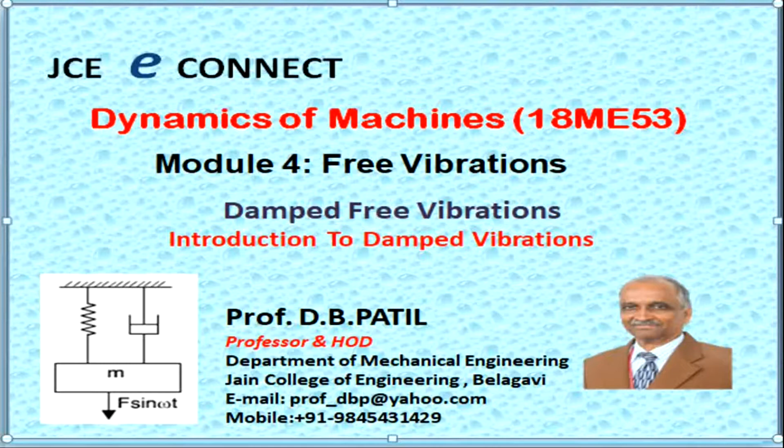Hello everyone. As I was telling in the last couple of hours, I shall start damped free vibrations, but somehow by taking a few more single degree undamped systems, I went on to discuss undamped free vibrations of single degree freedom systems in my last class. I have taught it for several hours, maybe 20-25 hours. But looking at the syllabus content and time permissible, I wound it up.

That topic is so interesting, and if you refer to any book, you will find hundreds of systems. If you have interest, you can go through and solve problems. But I am not 100% sure you can rely on that kind of question in the examination. We now have a topic, damped free vibrations, which is relatively simpler and more mechanical, substitution kind of problems, and therefore from the examination point of view this is highly reliable. But to understand this, you can't be blind about undamped free vibrations - if you don't have any idea about that, you won't be able to follow.

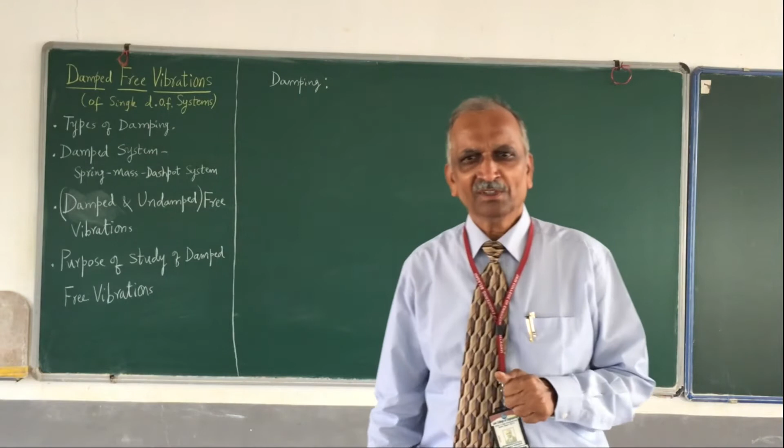Say you are riding a bicycle on a smooth road, and if the wind is opposing you, you have to pedal so much that you put in a lot of energy to proceed further. What is the meaning of that? Air is resisting your motion. That is nothing but air acting as a damping.

Similarly, the kind of mechanical systems, the machines which we model, we call systems - it may be single degree freedom or multi-degree freedom system. Damping is bound to be there in all our real systems. Then when it is not there, why did we study undamped vibrations? The purpose of studying undamped free vibrations was to know what is the natural frequency of the system.

Now also for damped free vibrations, since any frequency of free vibrations is natural frequency, and the system is damped but the vibrations are free vibrations, I am going to find out what is the frequency. What should I call this? This frequency I call damped natural frequency.

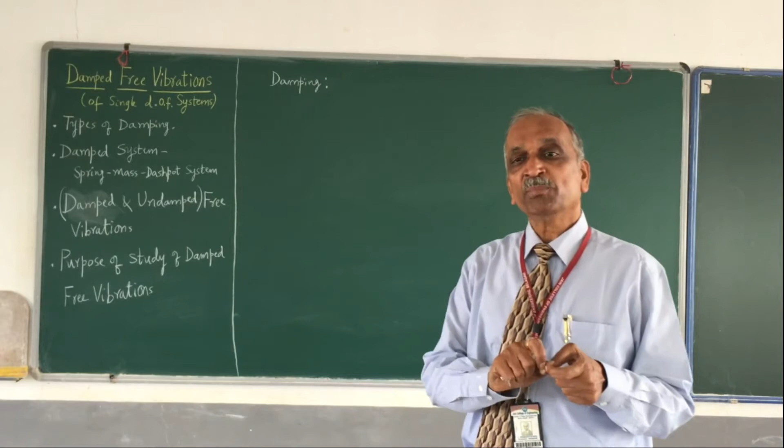In case of undamped natural frequency, I didn't call it undamped natural frequency - by default, whenever I say natural frequency, it means an undamped system. If I have a damped system and want to talk about natural frequency, I shall call it damped natural frequency. Of course they are related, and what is the relationship between the two, all that we shall study.

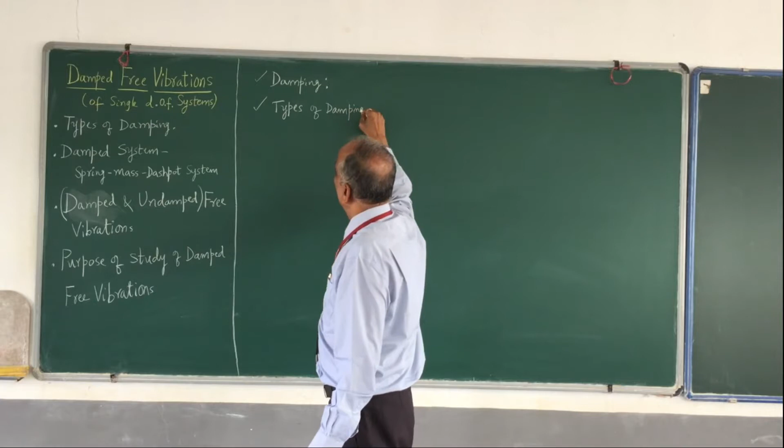So we have understood what is meant by damping - the resistance for motion. Then what are the types of damping in our mechanical systems, the machines? What are the different dampings we come across? This is a very common question that frequently appears in the examination - please write it down: state the various types of damping and explain in brief.

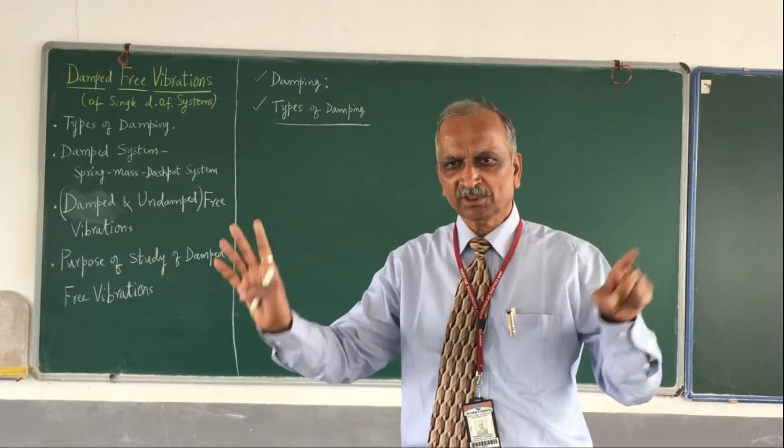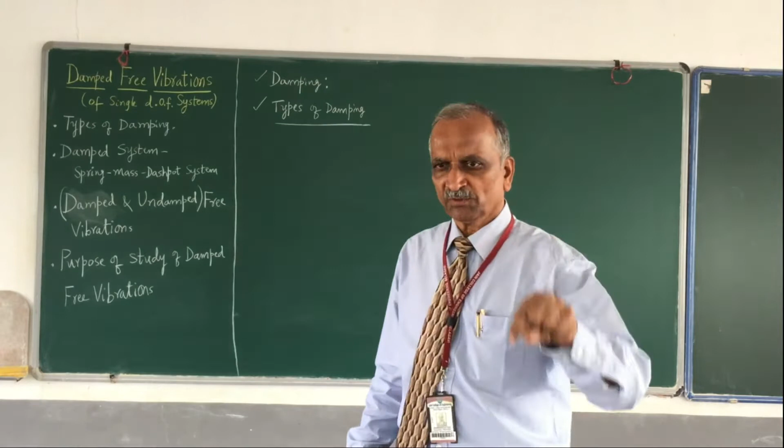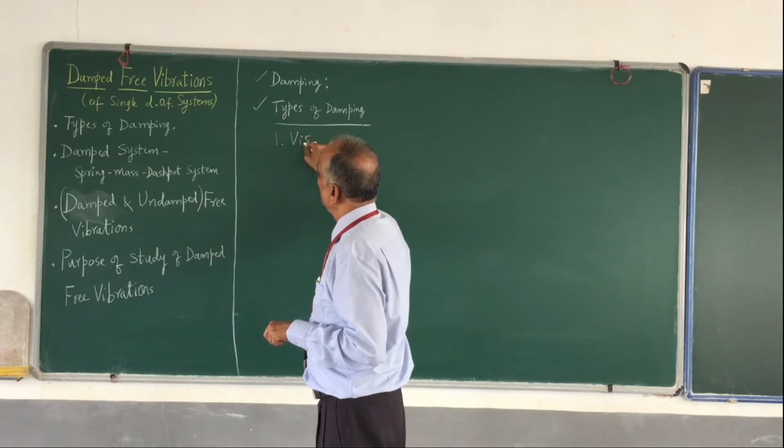That is a very common question for about 6 marks. I shall discuss part of it, not the full thing - I want you to take it as an assignment question and make notes for it. The various types of damping are: number one, viscous damping; number two, Coulomb damping; number three, structural damping.

Structural damping. And number four, non-linear, which is called slip or interfacial damping.

Okay, for part of the question I posed and made you prepare, I have answered: state the various types of damping. These are the various types of damping.

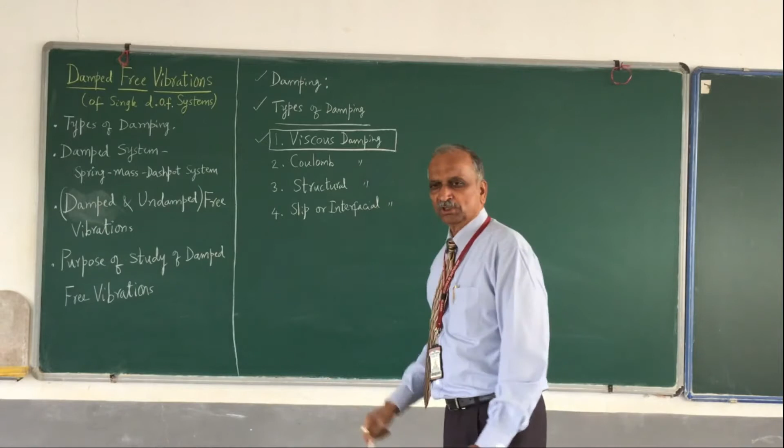I am not going to explain all of them, but I shall definitely explain viscous damping, because this is the one we are going to discuss in our systems in this course. So what is viscous damping? I shall discuss it, and all other things you are supposed to prepare. I shall tell about this.

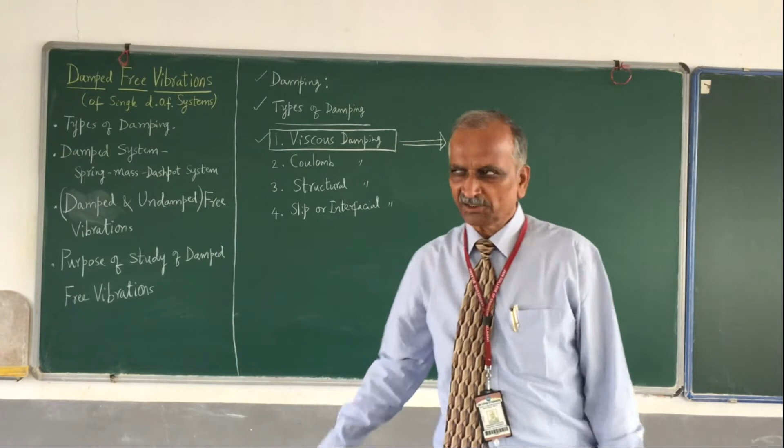What is viscous damping? What is viscous? The term comes from viscosity. Do you remember the definition of viscosity? We never talk of viscosity for a solid. Viscosity is something related to liquid or even fluid for that matter.

Liquids, we have viscous fluid, that's what we keep talking about. The resistance for flow - all fluids flow, we know that. So if there is a resistance to flow, that resistance is called viscosity. Viscosity is the property of the fluid. Every fluid has viscosity, and by virtue of that it resists the flow, it resists the motion of the fluid, and that is called viscosity.

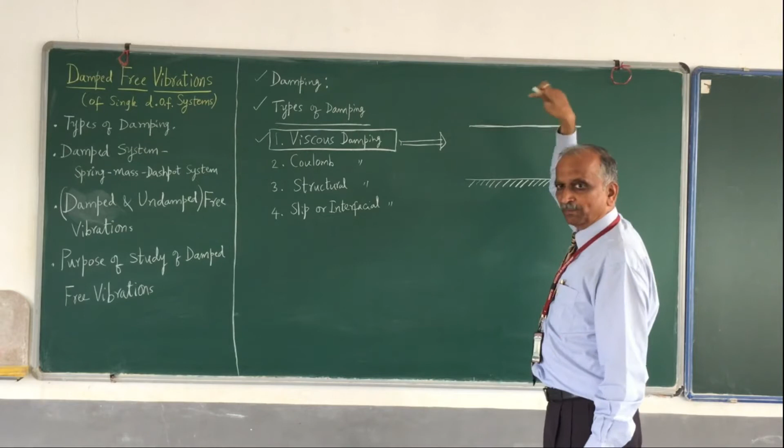So probably this kind of figure - imagine here, with this discussion, say I have a fixed plate. I hope you understand, fixed plate, this plate is fixed. Okay, so I have another plate here. Please remember, it is not a line, it has a dimension perpendicular to it. This is the fixed plate, this is the moving plate. We call it the moving plate.

So the motion will not happen just like that. I have to apply, I must be pushing it. I apply a force F, and because of which it is moving. So this is a plate, and to this plate I apply a force F, because of which this is moving. And in between, what is there? So you have what you call the liquid, you have fluid.

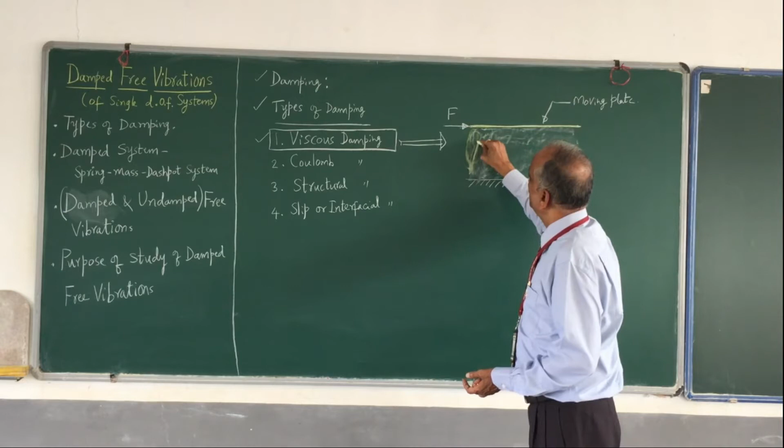Whose viscosity is, say, mu. Mu is the viscosity of this fluid. I shall not go into detail about what is this, what is the definition, what is the unit, etc.

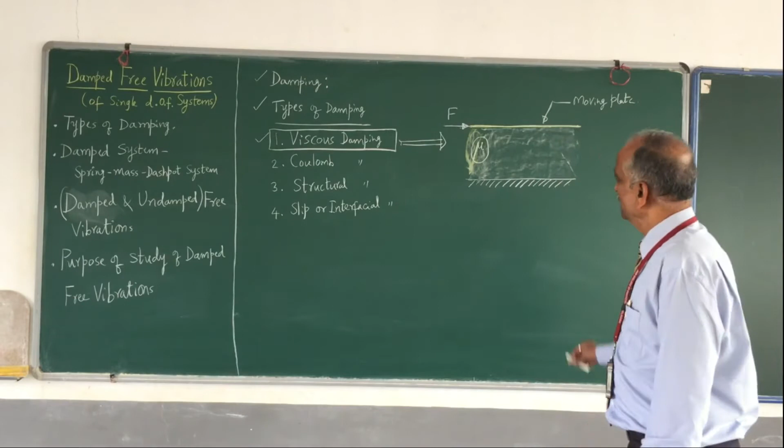Let me assume that this plate is moving very smoothly, or in other words, the velocity is not very high, and even the liquid has to move. The fluid between these two plates, any fluid layer - usually we believe that for smooth flow, the fluid moves layer by layer. So I have one layer of fluid, another layer, another layer. Like that, these will be moving in the form of layers.

Any fluid in contact with the fixed plate has zero velocity. Anything attached to this moving plate shall have the velocity of this plate. That means the velocity is varying from 0 to whatever the plate's velocity. If the plate is moving with velocity v, then the velocity is changing between 0 and v.

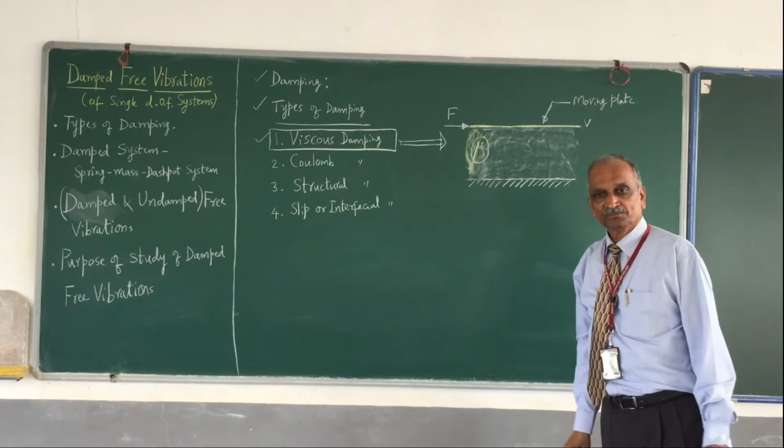How the velocity is changing is very, very important. It may be smooth, say a straight line variation, or it may vary something like this, whatever the variation. Let me assume that this is the velocity, so in this way it is varying. So this is the line. Here the velocity is 0.

So what is the velocity at this distance? That is nothing but this is the velocity. So if I move like this, this is the velocity. At this top plate, this is the velocity, this is what I mean by v. So it may be linear also, depending upon the fluid. This is what we call the velocity variation. So now this is mu, this is the velocity variation.

Why am I telling all this? I am not taking you to a fluid mechanics class, but definitely you have come across this kind of discussion in your fluid mechanics class. So now you have something called Newton's law of viscosity.

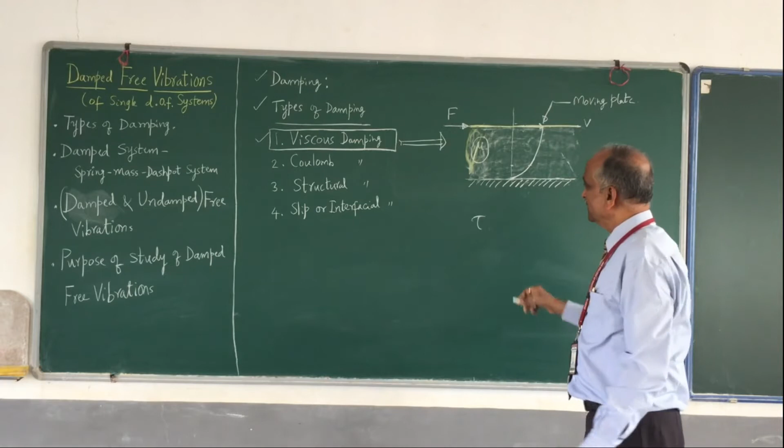Newton's law - what does it say? It says tau, the shear stress anywhere - as I said, one layer is moving relative to another layer, there is what is called shear stress between the layers. That is shear stress, I call it tau. Tau is proportional to... okay, tau is equal to... so what is that? It depends upon the velocity gradient.

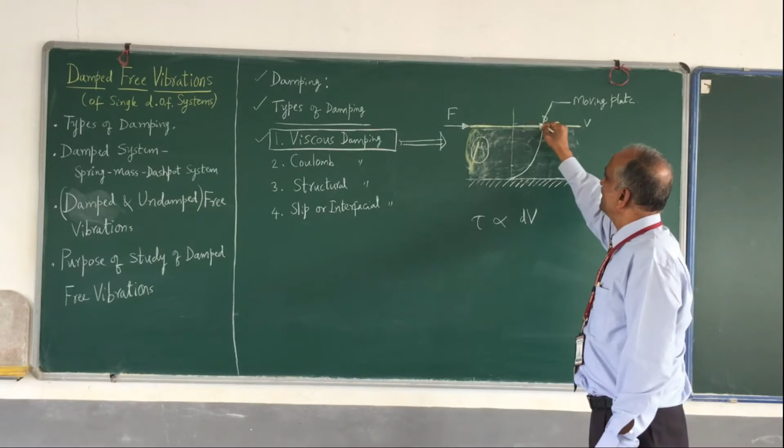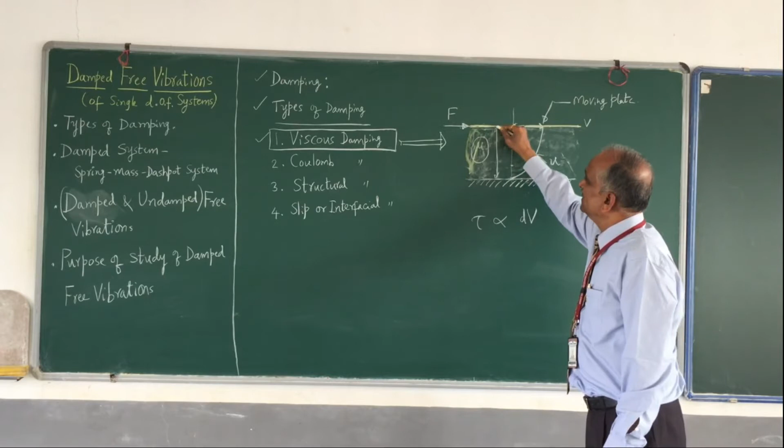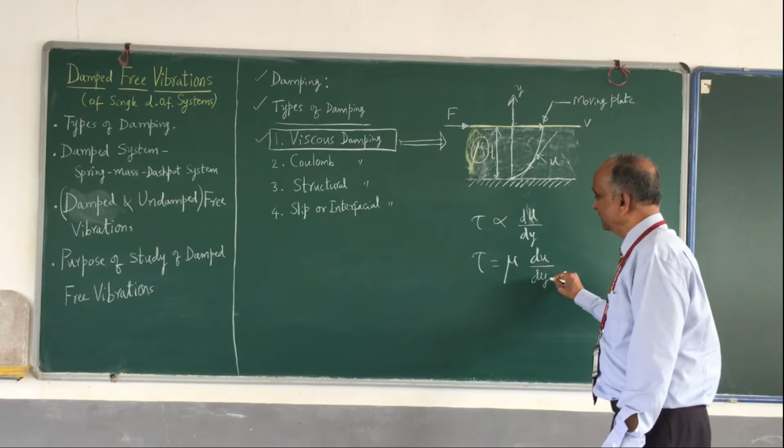So if I want to know what is du by dy at this point, what should I do? I should draw a tangent, then find the slope of that. That is nothing but du by dy. Therefore, tau is equal to mu into du divided by dy. This is the velocity gradient, and tau is nothing but the shear stress.

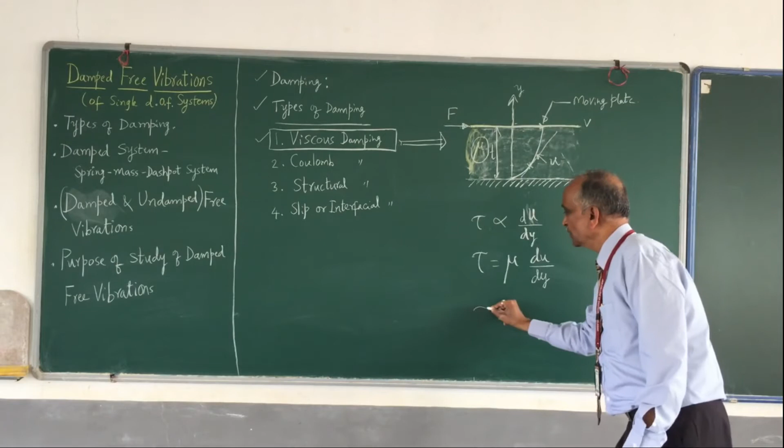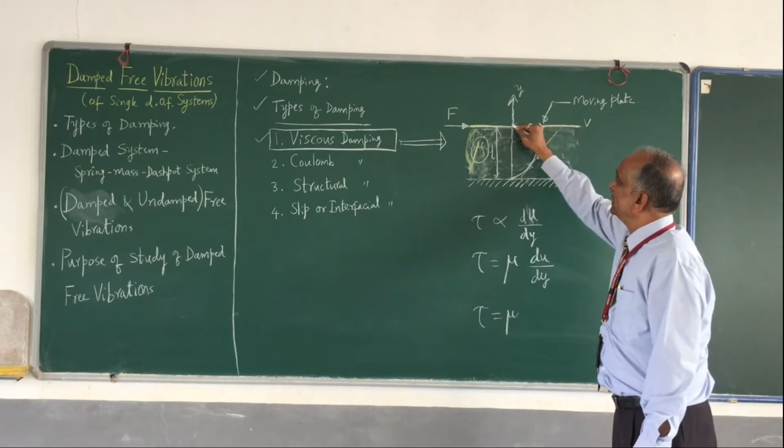So I would like to know what is the shear stress at this level. So in that case, what is tau here? Tau is equal to mu into the velocity gradient. As I know the velocity is v, divided by this distance, which I have called as t, so it is mu into v by t.

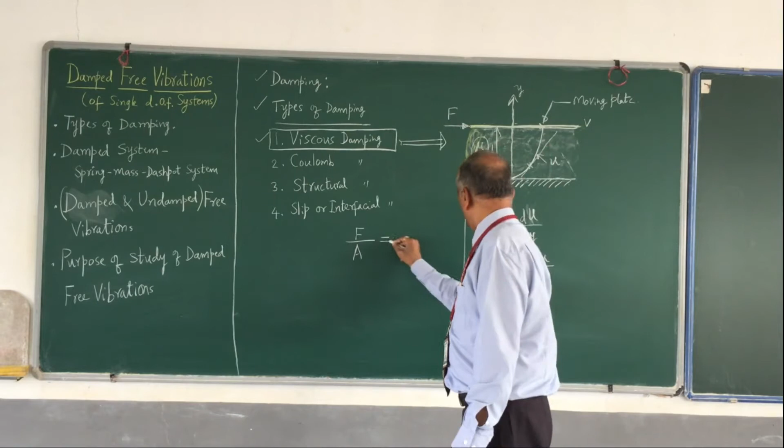As I know, tau is equal to shear stress, which is equal to the force applied divided by the area of this plate, the bottom area of this plate, this length multiplied by whatever is the dimension, that gives the area. So F by A is equal to mu into V divided by T, or in other words, F is equal to mu into A divided by T, this into V.

So I have put some terms within the bracket here. The idea is that for a given case, for a given fluid, mu is constant. Mu is not varying, whether mu is here or here or here, its viscosity remains same. Then the area of the plate remains same, it is not going to change. After some time the area is not going to change either. A is also constant, and this depth T also will remain constant. So how much depth of oil you are going to have, that also is constant.

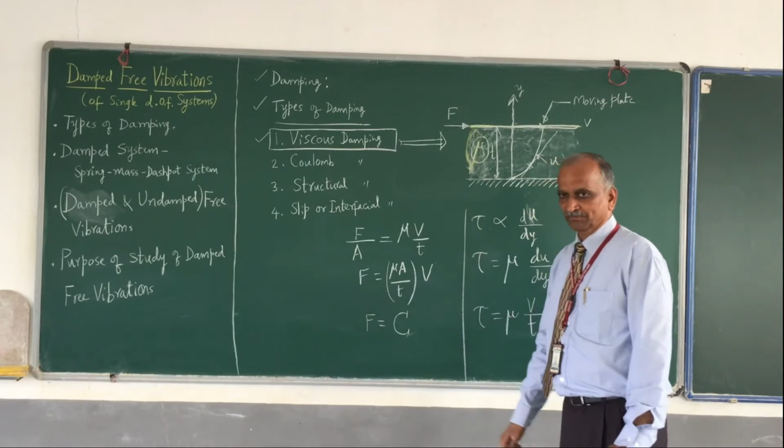That means this term is constant. So therefore I can say that F is equal to this whole thing, which I am going to call C, the coefficient of damping, multiplied by V. So therefore, I call it F is equal to C, and velocity I shall replace it by X dot.

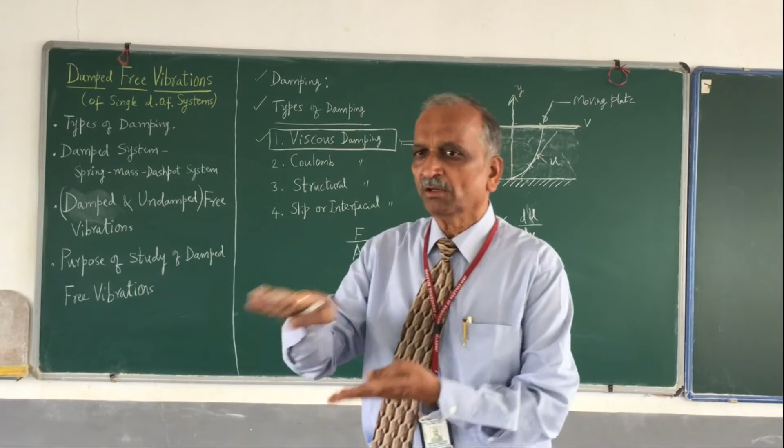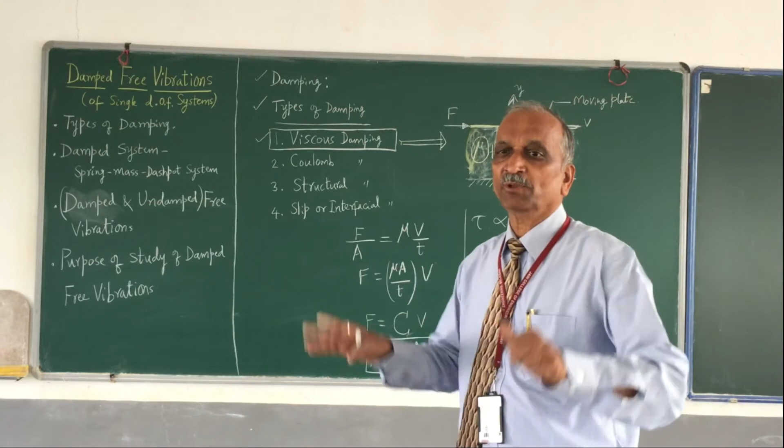So what is this force? This is nothing but the damping force. The damping force is equal to C into X dot, or damping force is directly proportional to the velocity. The viscous damping is also because of the friction between the two layers of the liquid, so this is also called liquid friction. Viscous damping is nothing but the damping because of friction in the liquids, so that friction is called viscous damping.

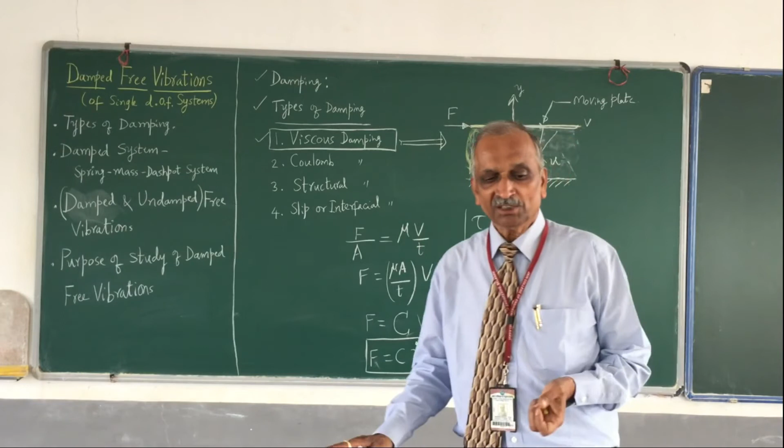Because of this simple relationship between the resistance force and the velocity, in most of the vibration discussions, they will have only viscous damping. They assume that the damping is viscous damping.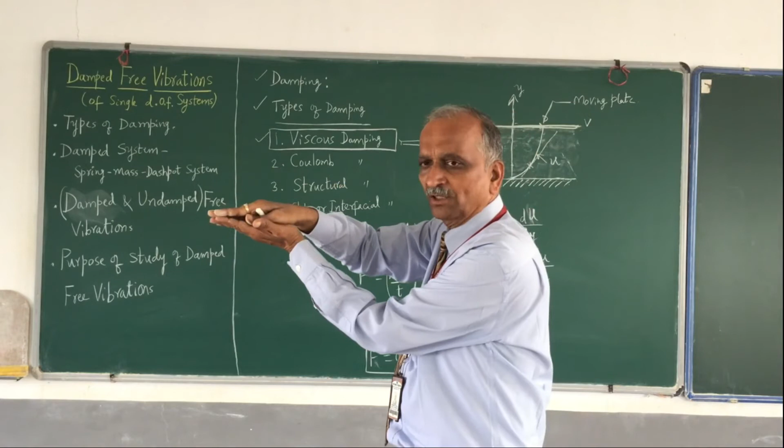Then, as I said, the damping may be Coulomb damping, also known as dry friction damping. So you have a solid surface, another solid surface, and they are in contact, and there is relative motion. You all know the friction laws, so friction is a must. There are so many such parts in our machine, and we are going to have Coulomb damping and other dampings also. All the dampings is possible to study.

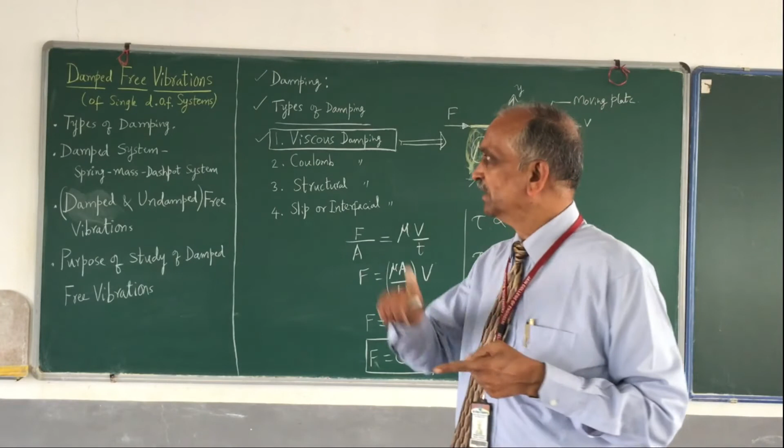For the sake of study, all these three dampings can be replaced by the equivalent amount of viscous damping. So therefore, whatever may be the nature of damping present in the system, it is possible for us to find out the equivalent amount of viscous damping, and hence always we are going to take what is called viscous damping. So we have understood how the viscous damping works.

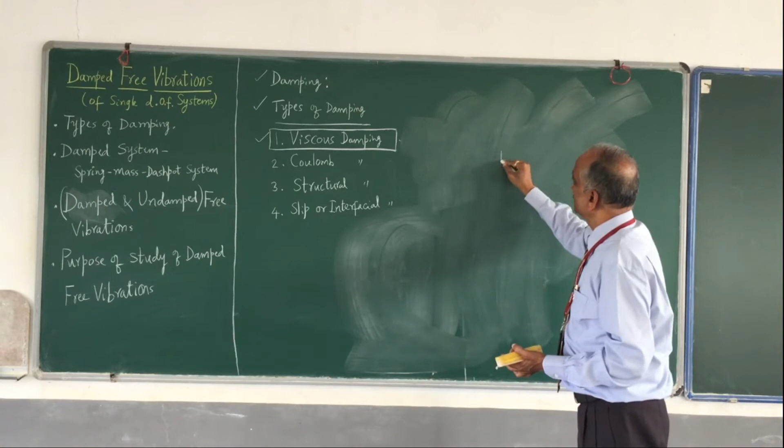Now, how it is going to be constructed in our system, how we are going to represent it. In our mechanical systems, we are going to represent something like this. We have a piston, and we have what is called as cylinder. This distance is equal to this distance, please adjust it. You have a piston, and this cylinder is closed. You have oil here, full of oil this side and also this side, and there is a piston which goes through.

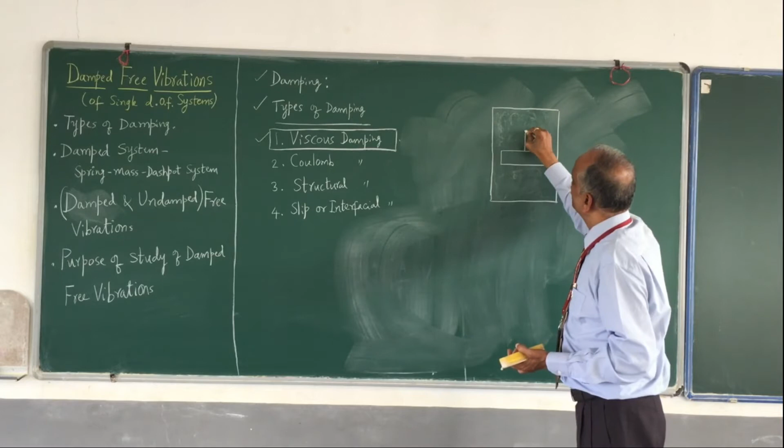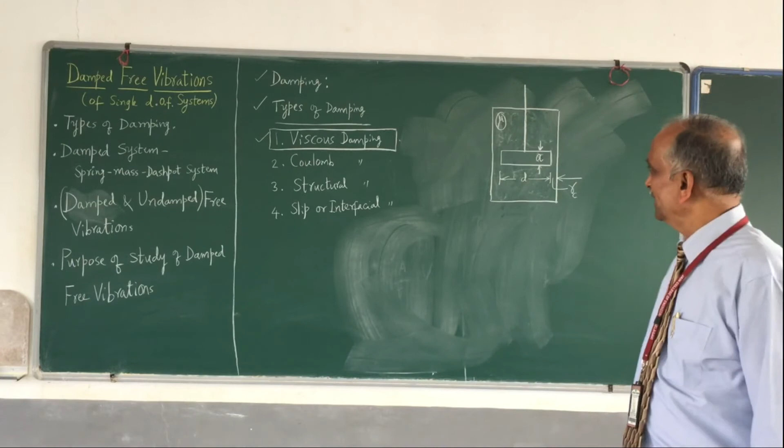Let me assume this dimension is what is called RC, radial clearance. I have this piston along with the piston rod, so it's solid, there is no relative motion between this. So this may go up and down.

When this goes up, the oil from this side will start moving to this side. And this piston goes down. Similarly, lacking space for the oil, this oil has to rush here. So this portion becomes our moving plate, and this one is our fixed plate, and this is what is in between.

In the previous diagram, whatever I had shown as some T is nothing but RC. Or in other words, what was C? C is equal to mu into A divided by T. I hope you still remember this. This was our diagram, this was our T, and this is a plate, moving plate, the area is this, and mu is the viscosity.

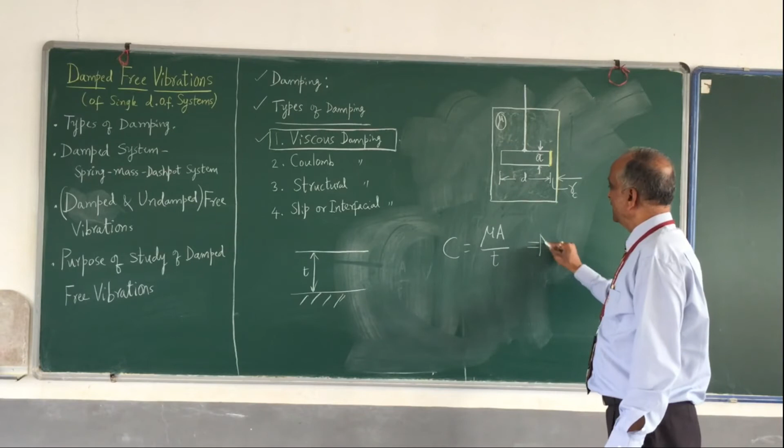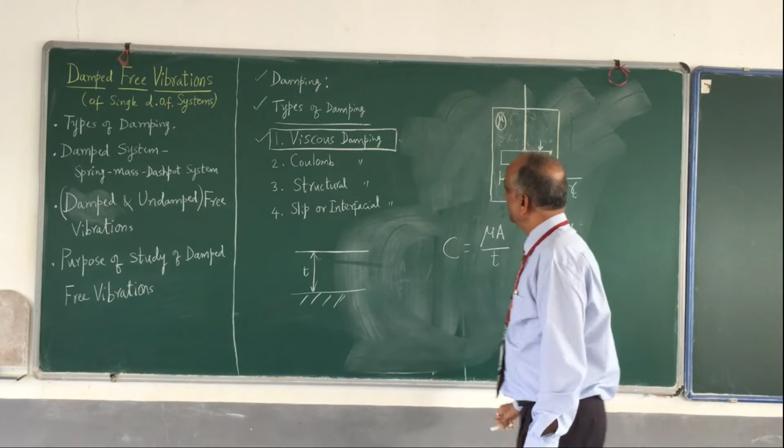So here in this case, if I apply this now, mu is mu only. So A is the area of the moving plate. Here what is the area of the moving plate? It is this portion. Please remember, it is not only here, it is all surrounding, circular in nature. That area is nothing but pi into d, the circumference multiplied by this distance. So pi d into A, divided by T.

T is the gap between the fixed plate and moving plate. Here this is the fixed plate, this is the moving plate. What is the gap? The gap is RC. So this value is what is called C.

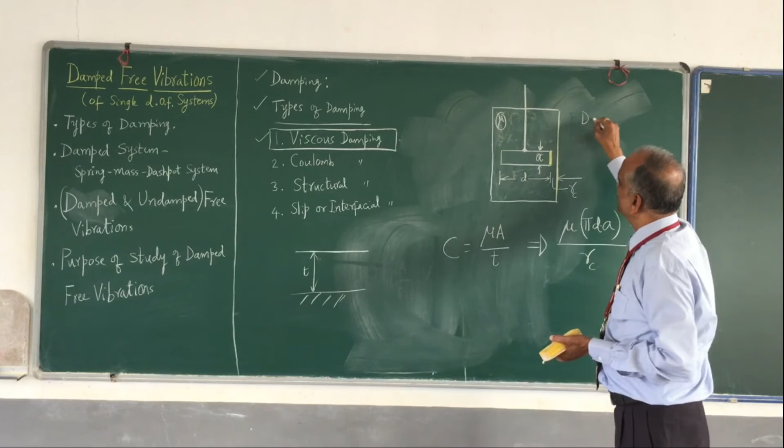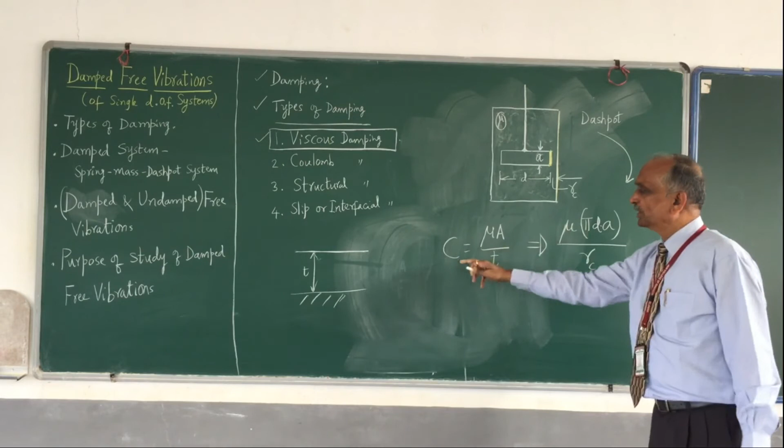So for any damper, this is what we call a dashpot, which indicates the viscous damping. For any dashpot, this is referred by its coefficient of damping. So that value C is equal to mu into pi into d into A divided by RC. For a given dashpot, the C value is constant.

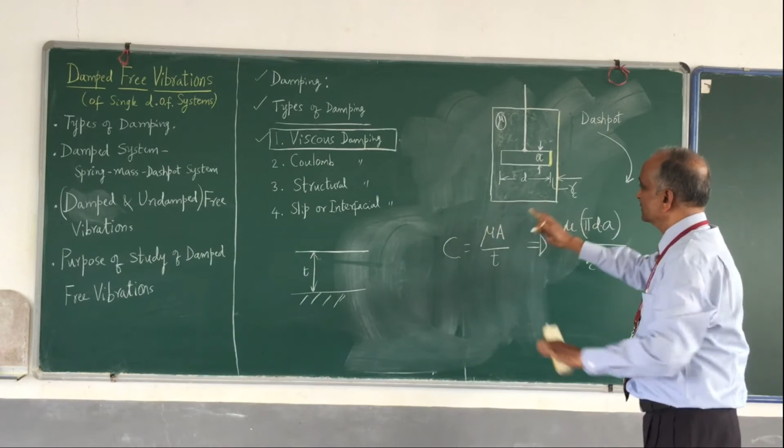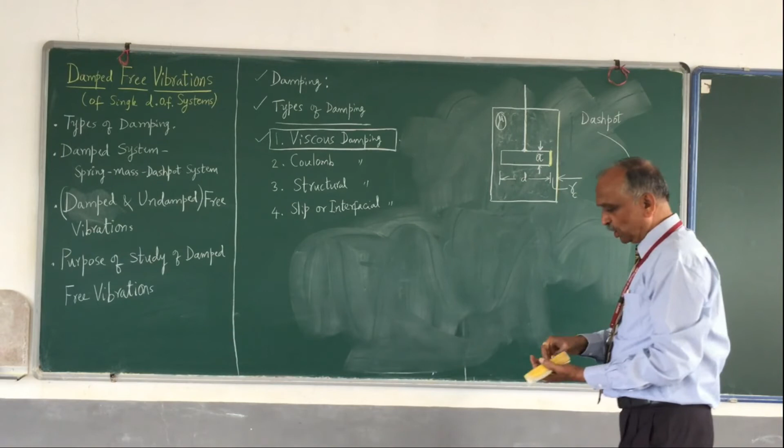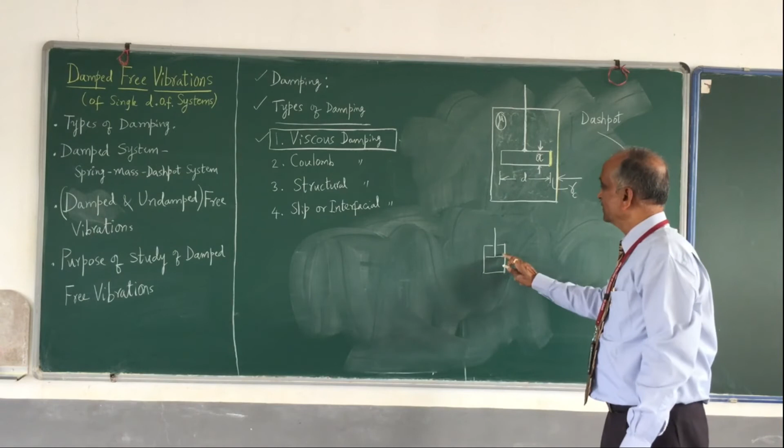I hope you understand. So from now onwards, we will not draw it so big, and in short we are going to represent it something like this. This is how we represent it. Sometimes we may draw a line here, or you may not have it, it doesn't matter. This is what we call a dashpot, the viscous dashpot. I hope you will complete the remaining things and prepare notes for this.

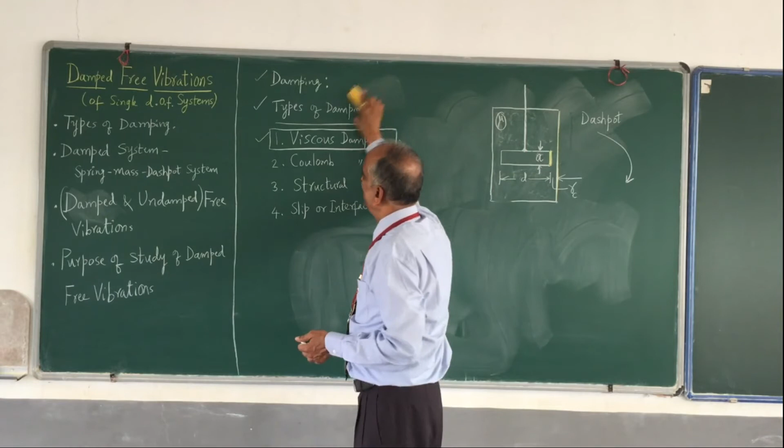This is what I mean by types of damping, and you have understood what is viscous damping, and how do we indicate a viscous damper, what is called a dashpot. Now, how does the damped system look like? A damped system of single degree of freedom: what shall be the components? Spring will be there, mass will be there, and now we have a new component, the dashpot. So the system may look something like this.

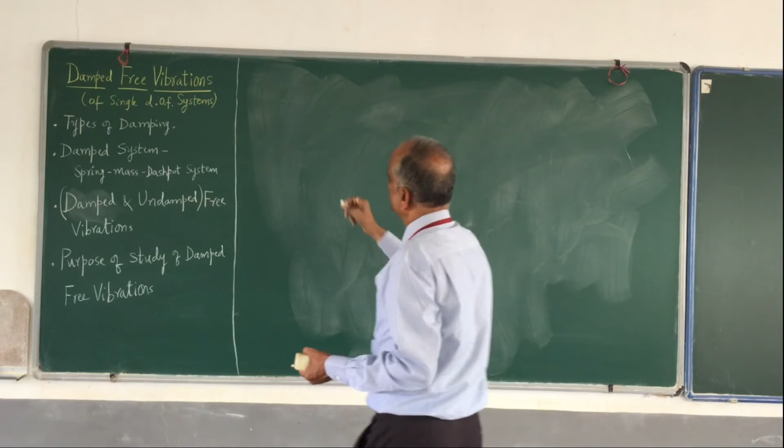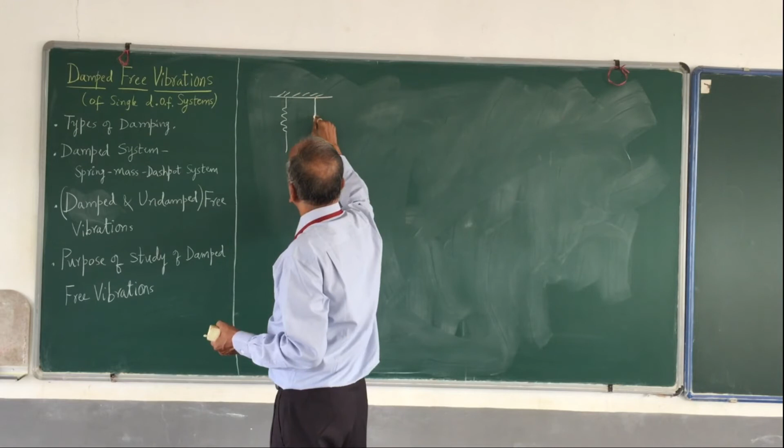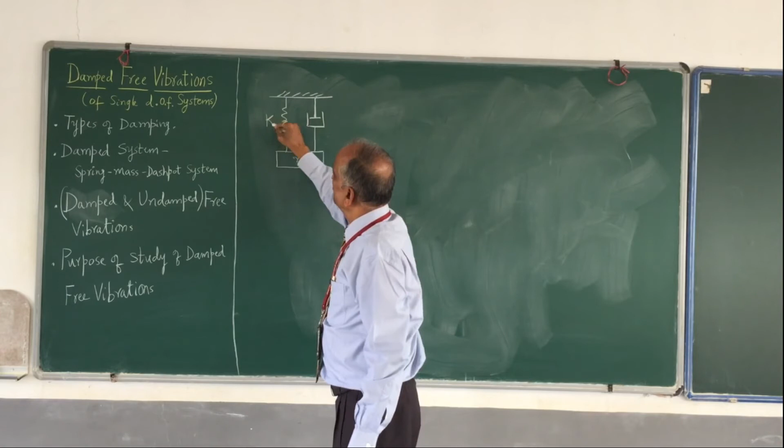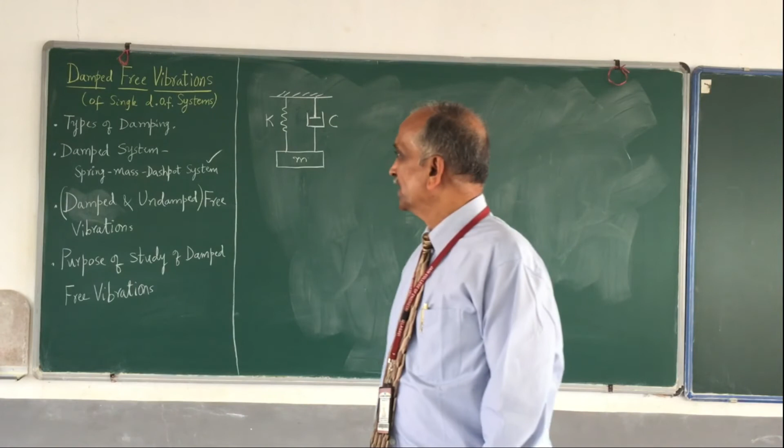So I have a spring, and the spring and dashpot are always parallel to each other. This is a dashpot, and we have attached a mass here. So this is the simplest spring mass dashpot system. This is the meaning. So our system of study is going to look something like this. We have a damped system, and that system is going to be a spring mass dashpot system. I hope you have understood this also now.

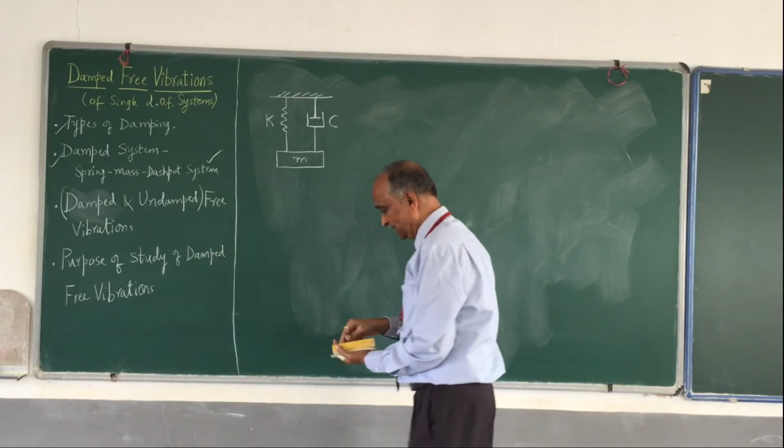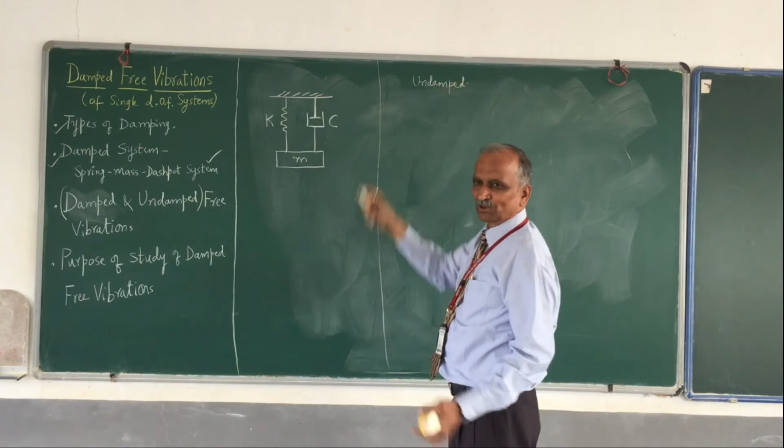Now the next thing I intend to discuss is undamped vibrations, of course free vibrations, versus damped vibrations, damped free vibrations, of course free vibrations. This free vibrations concept is applicable for both cases. So now I would like to discuss this and this. The first thing I can say is these vibrations are also free, and these vibrations are also free. And immediately I can say that the system here is undamped, and the system here is damped.

So this is how the damped system looks, and let me draw the figure for the undamped system. This is how the undamped system looks like. This is M, so this is an M system, spring mass system. This is a spring mass dashpot system. Okay, so undamped, fine. Now what happens?

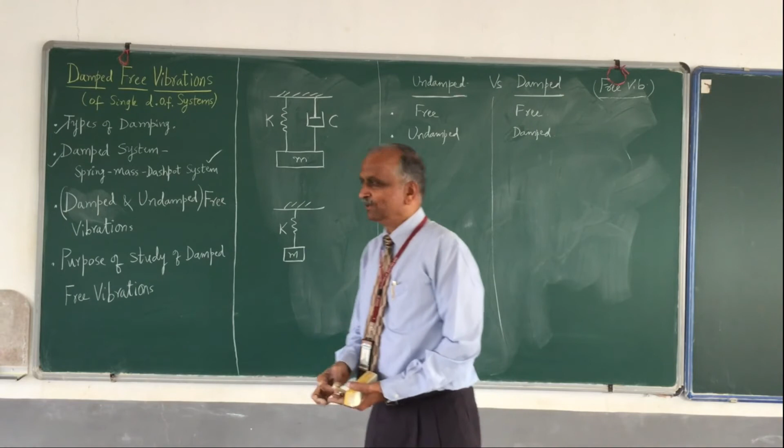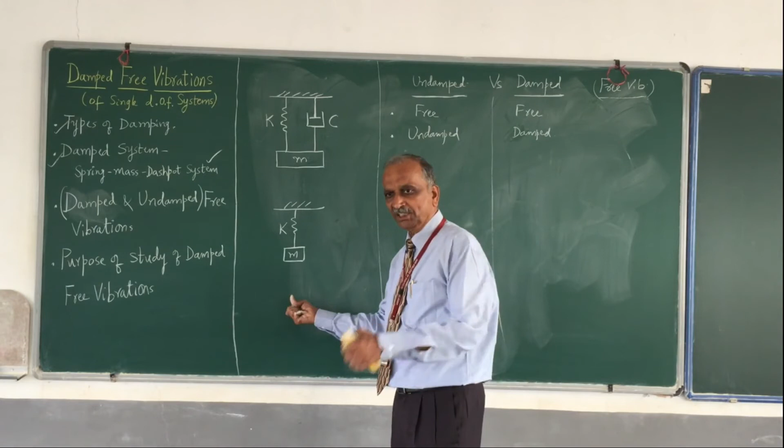So to start the vibrations, free vibrations, what do I do? I pull this mass up to here. What I mean is I apply force and have some displacement, and leave it. Then this mass will go on oscillating like this. So why does it oscillate? Just because when I pull this mass up to here, I have done work. Work has been done, I have applied force and also displacement has taken place. Force multiplied by displacement is the work, that is nothing but the energy which I have pumped into the system.

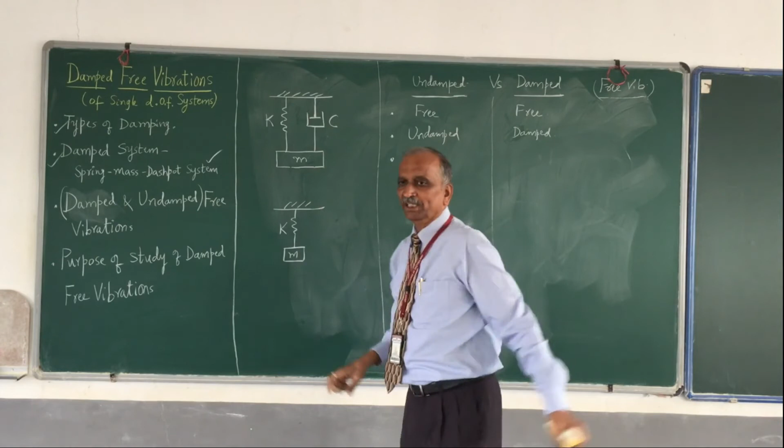Similarly here also, if I want to start the vibrations, I pull this mass here to here. That means here also I have pumped energy into the system. So in this case and in this case, the difference is here I don't have any damping.

That means nobody is resisting the motion. So whatever energy was there, that much energy will be there all the time. So these vibrations shall go on forever. There is no loss of energy.

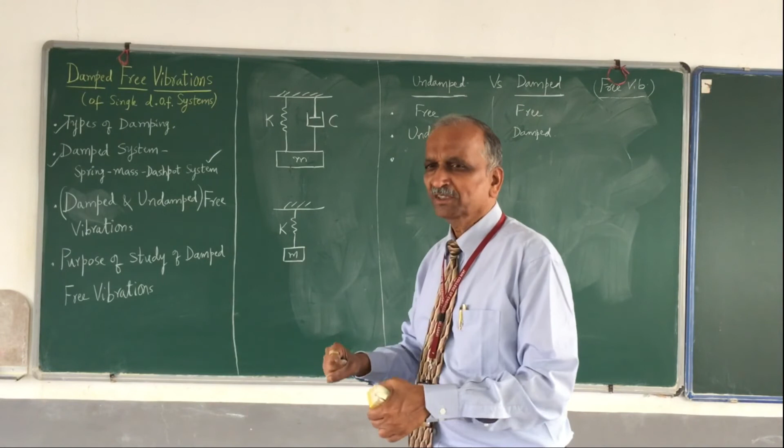But what about here? Every moment, every motion, there is a continuous opposition, and therefore, whatever energy you have pumped in, there is a continuous dissipation of energy. There is loss of energy.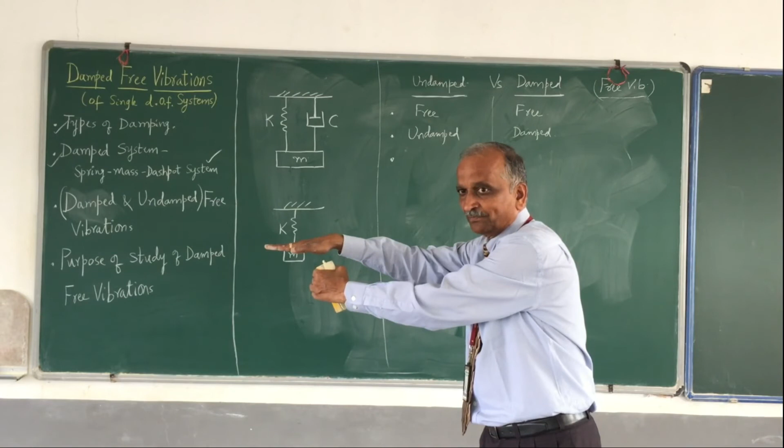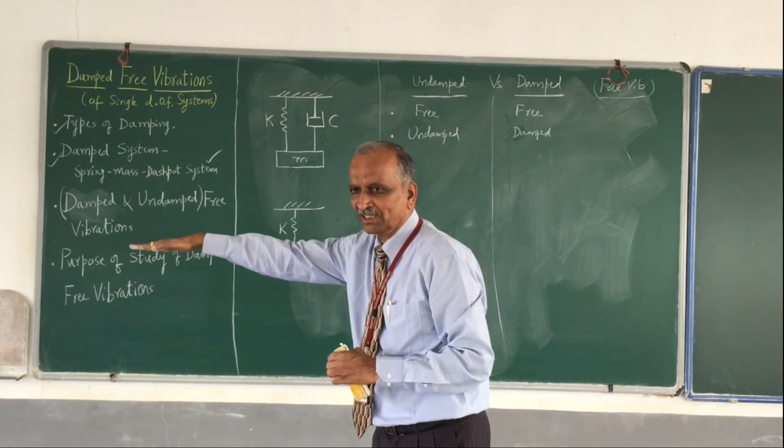The damping, what is the meaning of damping? The motion has to take place against some force. That means some extra energy is spent, whatever energy the body has, in moving further. And slowly your energy becomes less and less and less. Sometimes finally it becomes zero, and you don't have energy to have vibrations.

So the vibrations, forever, all the time in undamped vibrations, forever, as there is no loss of energy. But here vibrations, I have a condition, if at all they are there.

What I mean is, sometimes I put this mass, pump in energy, and leave it. That energy may not be sufficient to have vibrations. So when I leave it, the mass may go back, come back to the equilibrium position, and stop there. It doesn't go beyond that.

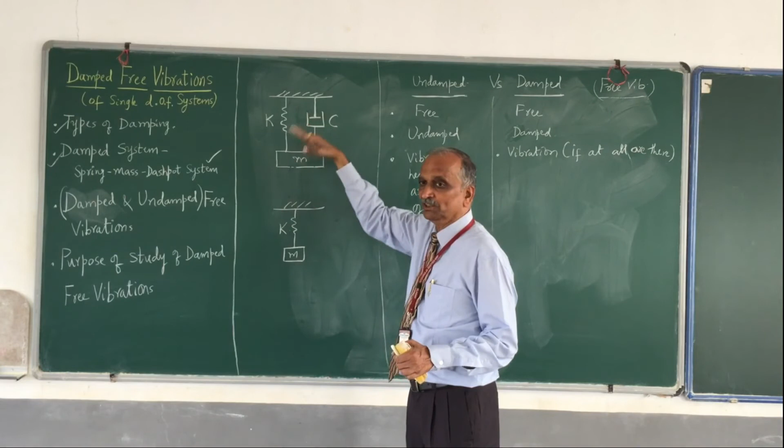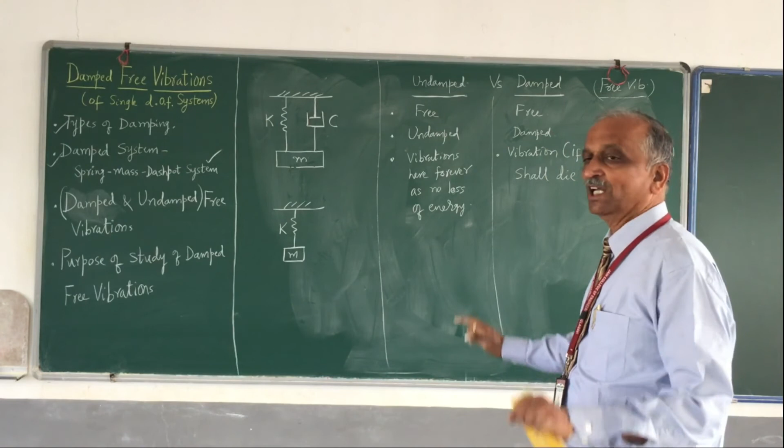If the mass goes on either side of the equilibrium position continuously, then only we say we are having vibrations. That is why, if at all there are vibrations, they shall die down soon. That means you will not see vibrations forever in case of a damped system, unlike an undamped system. I hope you understand the difference between undamped free vibrations and damped free vibrations.

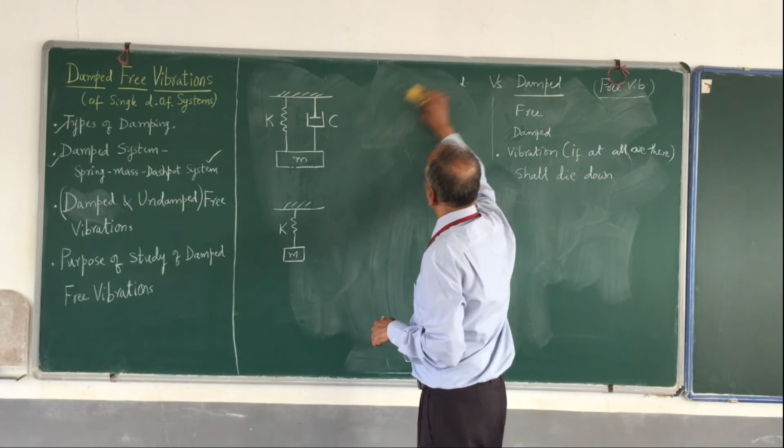Then what is the purpose of studying this? As we know, vibrations may be there or may not be there, and that part also depends upon the value of K, C, and M.

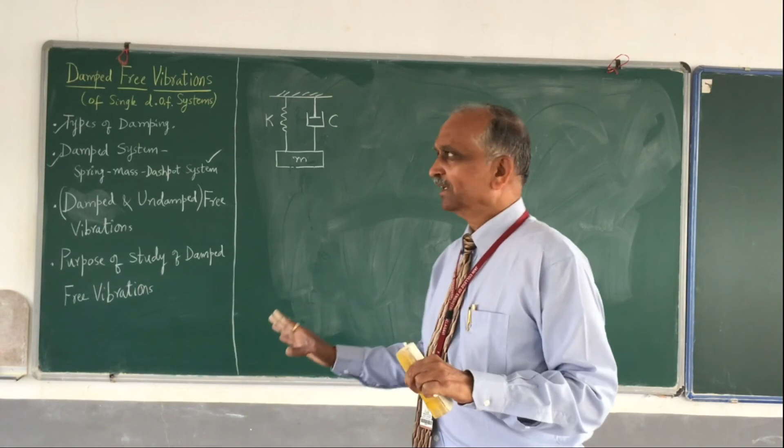They will decide whether vibrations are going to be there or not. So under what circumstances we have vibrations, and under what circumstances we are not going to have vibrations, that also we are going to study. If we are not going to have vibrations, we are not going to discuss that much, because our purpose of study is to study vibrations.

So under what circumstances do we have vibrations? Then vibrations are there, moving like this, and after some time it becomes zero. So every time, this is what, from this position I am going to the one extreme position. What is this? What do you call this?

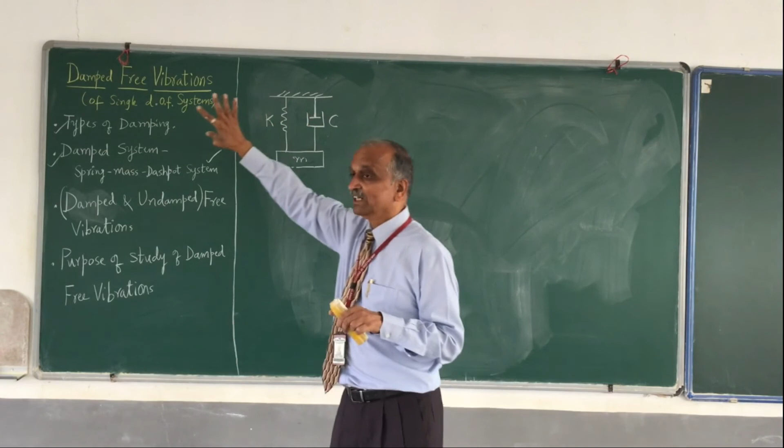This is called amplitude. Amplitude is the maximum displacement of the mass on one side of the equilibrium position. So in case of damped free vibrations, the amplitude of vibration is continuously decreasing. And in case of undamped, the amplitude will never decrease, it will remain the same all the time.

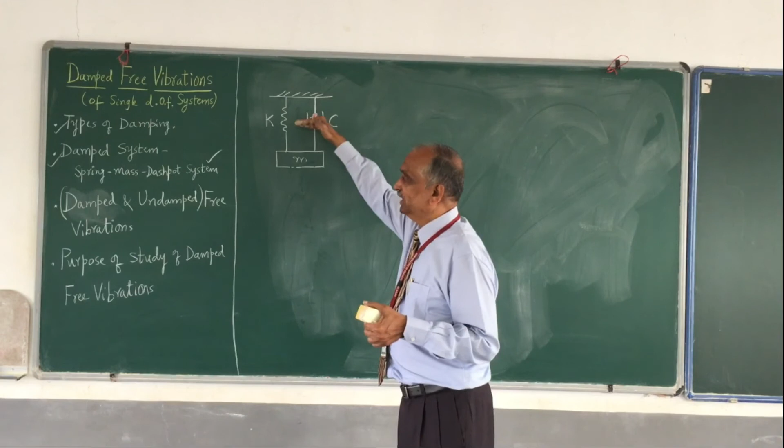Here, the amplitude of vibration is decreasing, and there is a definite rate at which it decreases, which we are going to call the logarithmic decrement. So our purpose of study is also to know at what rate the amplitudes are decreasing.

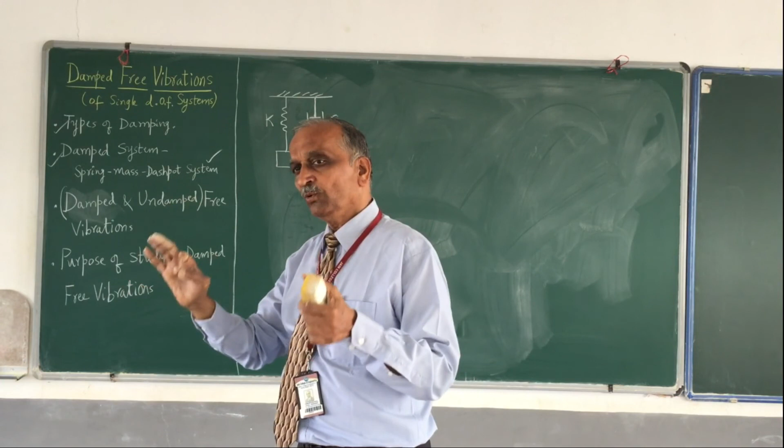So there is a difference in the study of undamped systems and this. In an undamped system, the amplitude is not changing, so that part was not necessary to study. Our aim was only to study the natural frequency of the system. So therefore, set up the free vibrations, write the equation of motion, and write the natural frequency. That is the end of study of the undamped system.

But here it is not so. Here also we set up free vibrations, write down the equation, then write down the solution of it, and then we also make a study. There the study doesn't end. That is the beginning of our study, as I want to know after how much time it is going to come to rest.

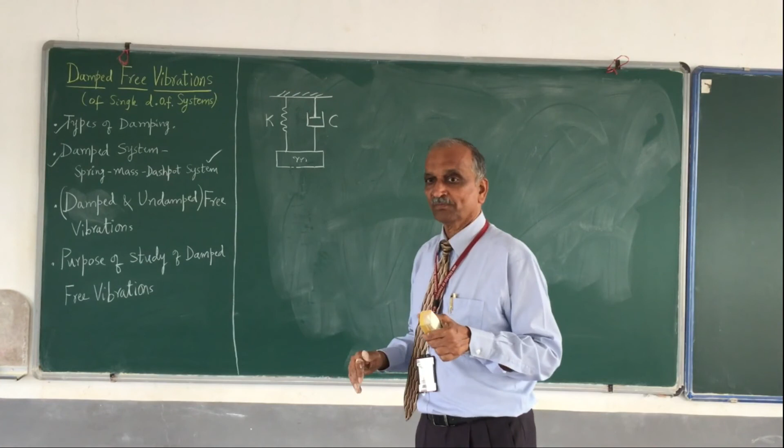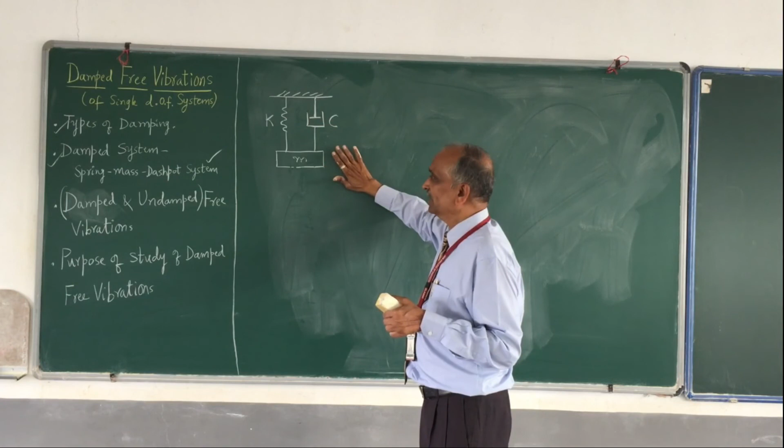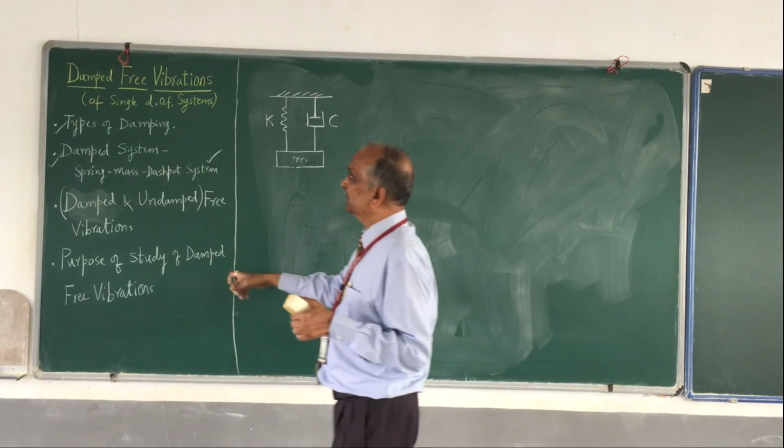At what rate the amplitude is decreasing? Therefore, the study is not going to stop once I write the equation of motion in case of damped free vibrations. In fact, the study is going to begin from there. So write the equation of motion, write down the solution, and check whether you have vibrations or not, etc. And that's what we are going to study under what is called damped free vibrations.

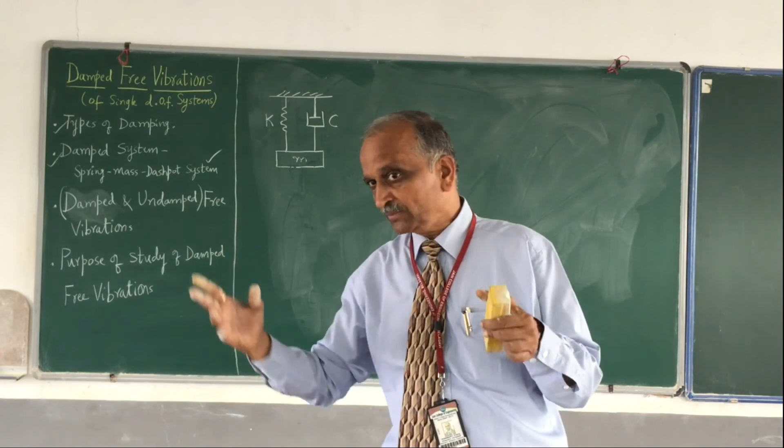I hope you have understood, you have some idea. Very interesting topic, relatively much smaller topic. Probably in 3 or 4 sessions, I wish to wind up this topic, and that is how this module can be completed 100%. Okay, all the best.